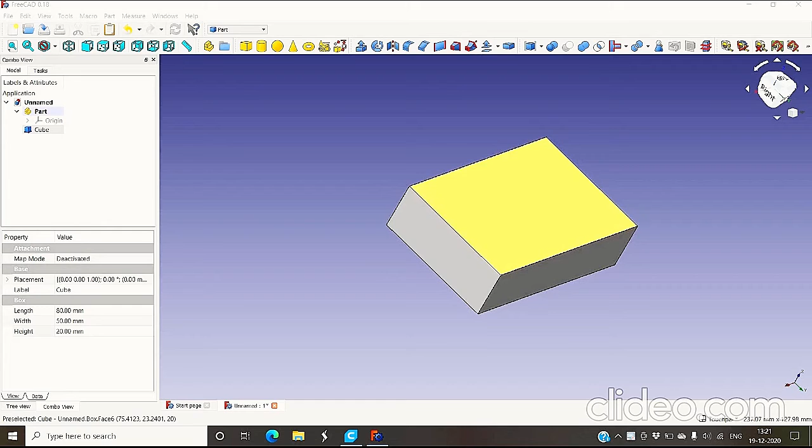Hello, this is Vishad Gohil, first year undergraduate student at IIT Kharagpur. I have created an interesting toy camera as a part of my DIY project.

Firstly, I downloaded the software FreeCAD and created a cube using Part, then filleted the edges of that cube. After that, I attached one cylinder to it, and with this, attached another two concentric cylinders over it, and carefully adjusted the dimensions and position.

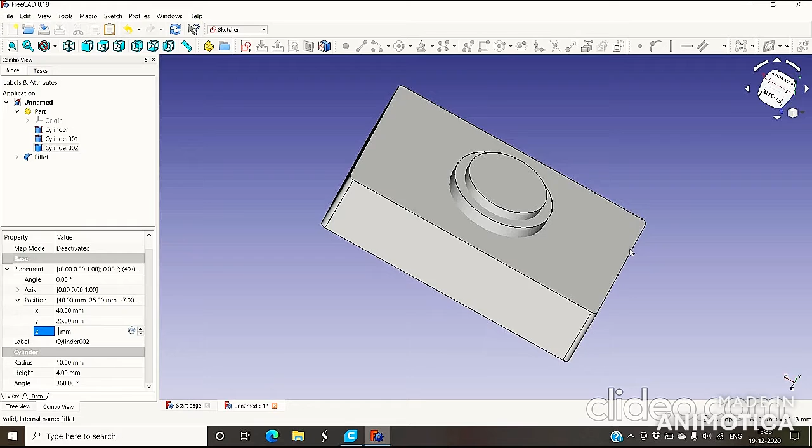Later on, I added three cylindrical switches on the front face of my camera and adjusted their coordinates and position. And with this, I created two switches on the top head of my camera, and filleted the edges of those switches also.

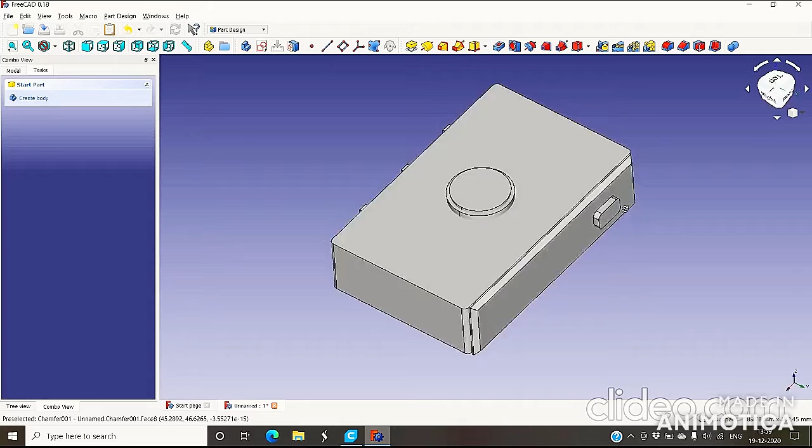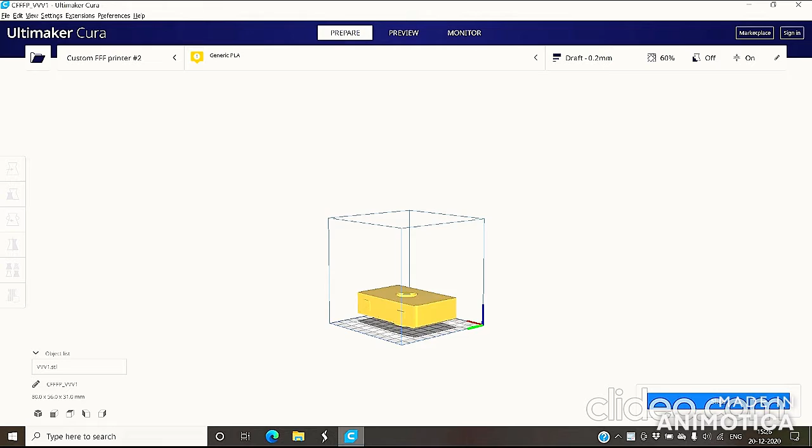After this, I filleted the side edges of my camera so that it becomes comfortable while holding and using. After that, I attached the word IIT on the bottom part of my camera to enhance its look and give it a very nice appearance.

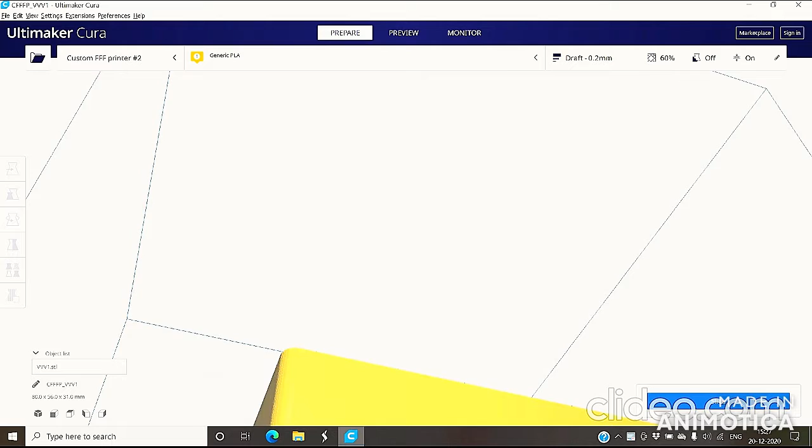After all these operations, I created the mesh design, meshed my model, exported it, and saved it. Later on, I downloaded the software Cura, which is freely available, and adjusted some coordinates in my model.

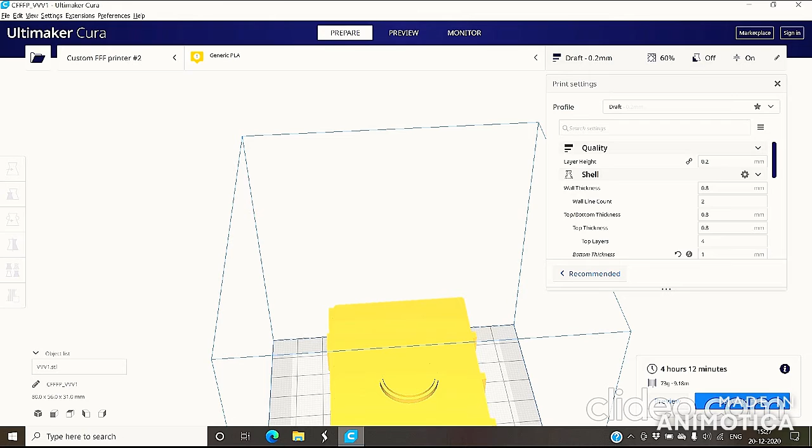I performed some adjustments in my model, like changing the infill density and setting the material. I also set the layer height to 0.2 millimeter and adjusted the wall thickness. This way I performed some operations, setting the infill density to 50% for my model.

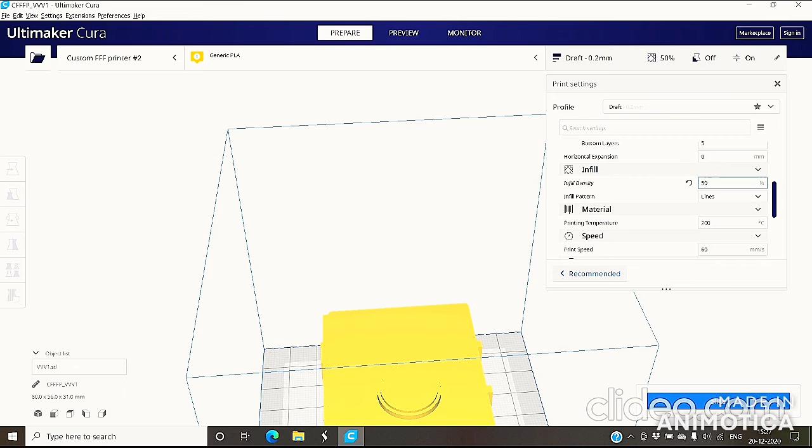It showed around 3 hours and 45 minutes to print this pretty looking camera with an infill density of 50%, and it required around 63 grams of material to print this model.

Finally, I generated the G-code file and saved it. So this way, this pretty looking camera was completed.